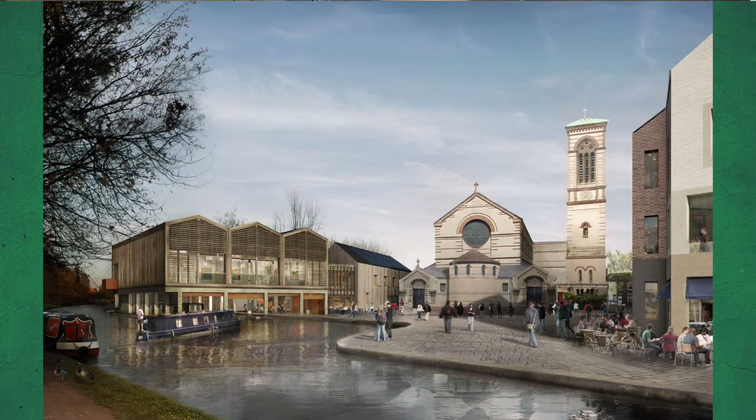My original client, SIAF, acquired the site from the receivers of Spring Residential in 2013 as well. And there then followed a period of 2 years of consultation with the community and various stakeholders. And the content of that scheme included a new boatyard with 3 docks, a cafe, a community centre with offices, the dance studio, badminton hall as phase 1, and with offices and a preschool with a private garden as phase 2. In 2015, there was a resolution to grant consent for the scheme, and in 2016, this was cemented with the conclusion of a Section 106 legal agreement.

Now, unfortunately, this scheme was not implemented due to a combination of factors, including the community's requirement to have a 3-year period to raise the funds to build the community centre. That, with other cumulative elements, rendered the scheme unviable. So we went back to square one, continued the negotiations with the community and with JWT. And one day, one of the JWT trustees suggested that we look at the option of building phase 1 of the community centre. The reason being that in the previous scheme, we were building the boatyard and we were going to leave a deck ready to take on the new community centre.

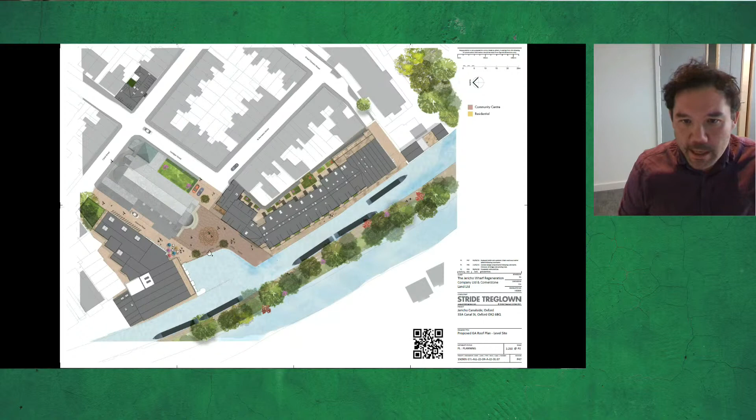It's quite important that you follow my cursor on the screen as I identify the different elements. And also just to say that the full set of planning documents are available to view on the Oxford City Council website. So I'm showing a selection here, just giving an overview and not going into too much detail, but you can see the numbers of documents, and the full scheme is available to view on the council's website. So to update on the current status of the scheme, to help you orientate on the drawing, this is St Barnabas Church here, obviously a significant aspect being a Grade 1 listed building.

So the scheme, as previously displayed at public consultations and previous presentations, has remained fundamentally the same with the exception of the bridge. It falls into 4 main constituent parts. On the north side of the site, we have the Boatyard and Community Centre building proposed. Then on the south side of the site, we have the private residential housing proposed. Both those elements, the Boatyard and Community Centre and aspects of the residential, will face onto the centrepiece, the piazza and the west elevation of St Barnabas Church.

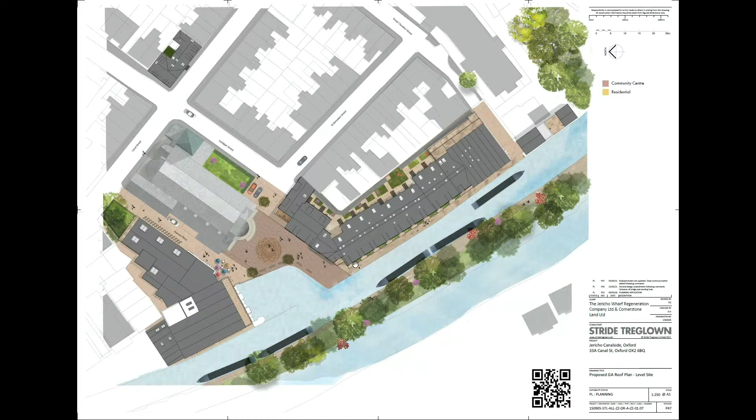We're also proposing a new access into St Barnabas Church, which allows for level access without ramps into the church, with the idea of bringing the original entrances into play and really completing what we would see as the aspiration of the church to front a public space, which it has never really done in the past. And then the other element of the scheme is the existing community centre, which is being converted into 6 apartments. So if I go on to the next slide, I can talk about the actual detail of the scheme.

One can see in the Boatyard here, 3 docks are being provided, 1 wet dock and 2 dry docks for the community to use. And then this line here, if you follow my cursor, will form the boundary of phase 1 of the community centre. So at the ground level of the community centre in phase 1, we would have a cafe and a shop and offices for the Boatyard. And then on the upper floors, there would be a badminton hall, further cafe spaces, and a dance hall, as well as offices for use by the community.

Beyond this line towards the east here, towards Canal Street, would be phase 2, the constituent parts of which would be a preschool nursery on the ground floor with its own private garden. And then above that would be offices for the trust to utilise or to let out as it sees fit.

And then in terms of the actual access to the boatyard, there is a basin, which I will go into a little bit more detail about on the following slides. In terms of the residential element, we have proposed 18 dwellings altogether for private sale, which effectively link Cardigan Street, the Piazza and the canal side into a single terrace composed of 15 townhouses and 3 apartments, which are on the south side, incorporating parking as well for all the residential.

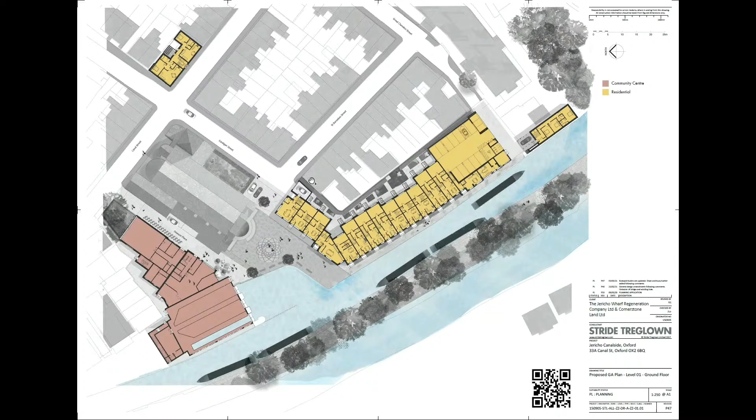And then finally, the community centre conversion here would comprise of 6 apartments being converted into affordable flats. Now, as Stephen mentioned earlier, following almost 9 months of consultee negotiations with various bodies such as the Canal and River Trust and the Environment Agency, the outcome just in the last month or so was the sad decision ultimately by the statutory authorities that they could not support a bridge across the canal into the Piazza,

fundamentally for 2 reasons. One being that on the Environment Agency side, a bridge would hinder flood water, which is quite a severe consideration now in terms of our impending climate change. And then from the Canal and River Trust side of things, it was significantly a matter of navigational safety and visibility, and also towpath safety, because of clearances bridges require. And unfortunately, the constraints we had in this scenario were too great for them to be able to support. In fact, they objected to it.

Another aspect of the scheme worth mentioning was that physically, the removal of the bridge retains the rest of the scheme in a similar footprint. However, the management is altered, because previously the basin was acting both as an entrance into the boatyard as well as a winding hole, and that combined with the bridge was also of a concern to the statutory authorities. So the current proposal is for the basin to be actually controlled by the boatyard, which allows for temporary mooring while there's a crossover of boats coming in and out of the actual docks themselves.

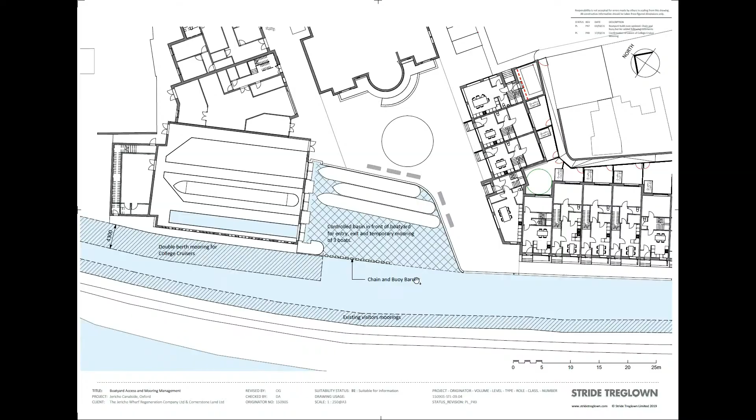And as such, you can see there's a chain and buoy proposed to help control this area so that it wouldn't be used for turning. So effectively, in all respects, the existing canal remains as it is in terms of its alignment. If I move on to this drawing, I'd just like to explain the amount of detail we had to provide and work through in terms of the flood mitigation.

As Stephen said, the national modelling of floodwater levels has altered in the last couple of years. So even since this previous application, which was approved in 2016, flood levels have changed, and the site, and in fact most of Jericho, actually sits inside a floodplain. Now, in achieving a building of any kind on this site, we have to meet three criteria. One, that it would be safe for use. Two, that it wouldn't impact on the actual volume of the existing floodplain. And three, it has to meet the requirements of flood water movement. So it's not just volume, it's actual water movement.

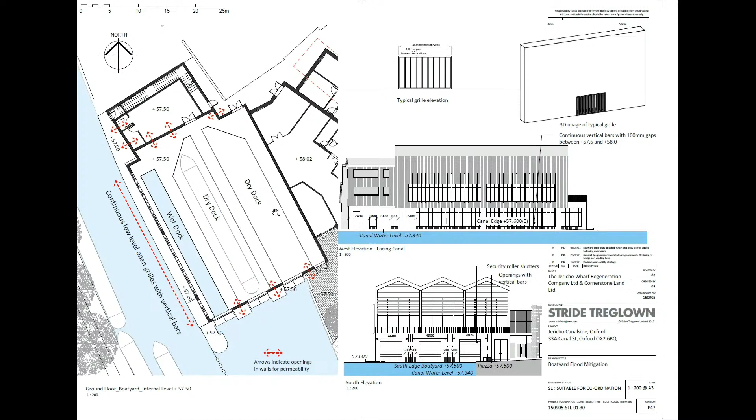So you can see here, this drawing displays the actual dock, which is going to be designed as a robust building to allow it to flood, in that water is allowed into the building. But you can see with all these red arrows, the Environment Agency wasn't satisfied that the sluice gates could just be opened and allow it to flood. We had to put additional holes into the building to allow water flow to mitigate flooding without any impact elsewhere. And as such, the building had to incorporate open grilles, etc., down at the low level. I move on to the next slide.

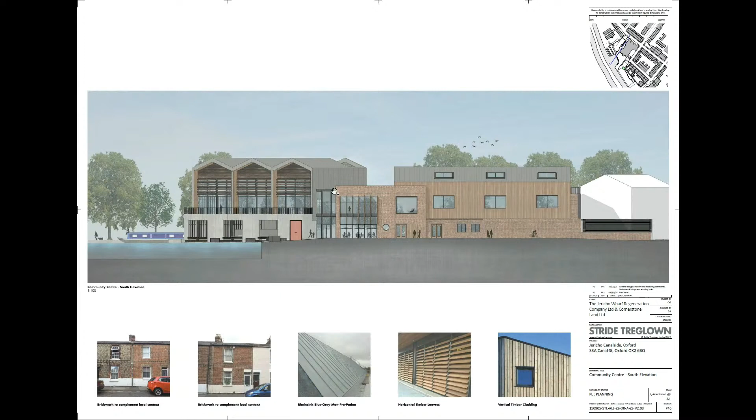And then coming up Dawson Place towards Canal Street, there's a slightly different change of character in that we're bringing in the idea of tying in with the Jericho brickwork, looking at various forms of brickwork to connect with the local scene. And this image here displays the canal-side elevation, again highlighting the community centre as a fairly industrial-looking building sitting within the setting of the church and the piazza, and then showing all the low-level grills that allow for flooding.

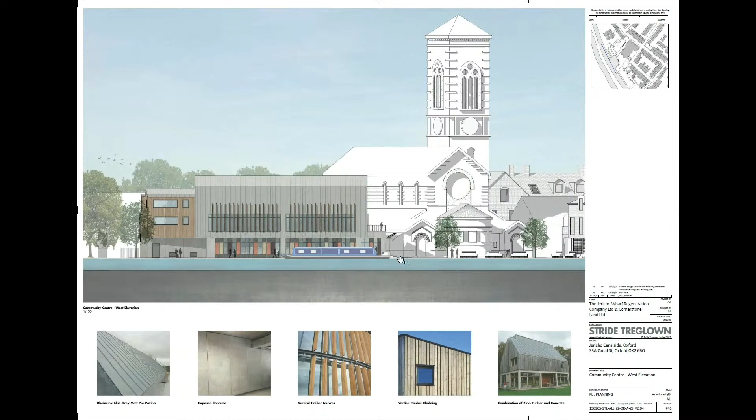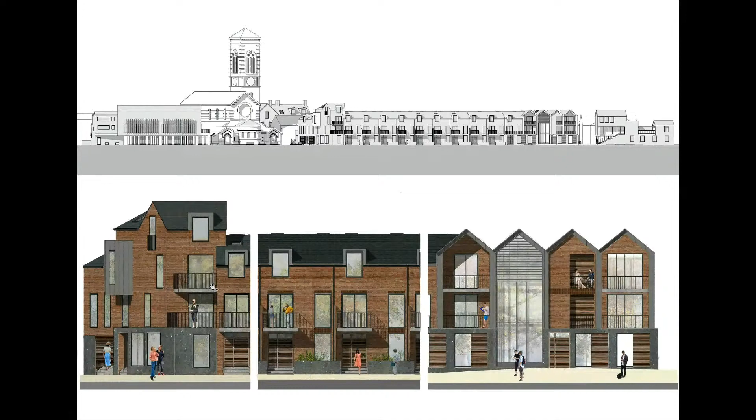This image here demonstrates the approach for the residential aspect, again picking up a bit of a cross between a vernacular and industrial mix that's commonly found on waterside buildings, but tying into the locality with the use of the variable Jericho brick patterns.

And this is the finishing slide, actually, just to show the intent of the quality of the scheme doesn't stop at the building, because of most importance really is the landscaping and how the finishes are on the ground in the public spaces. So we're proposing here high quality materials using natural stone cobbles mixed with paving slabs, which would give a high quality and rich finish to the public areas.

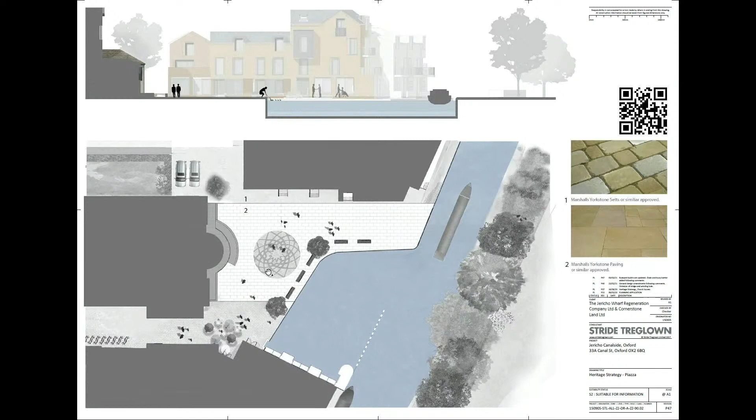And an aspect to also bear in mind is that in the SPD there was a call for some form of artwork to be incorporated into the overall proposals, and here we are identifying artwork inlaid into the piazza, and the final design is open really for when we hopefully move on further. And that concludes my presentation, John.

Thank you very much. Okay, let me ask you 2 or 3 questions as well. This question I asked you, is the bridge firmly dead? Is the parrot dead? My answer refers back to Stephen, because it's sad to lose the bridge in that location, but when one has statutory authorities objecting on health and safety grounds, it becomes virtually an impossible thing to try and deliver.

So the bridge doesn't necessarily have to be dead, but the ability to have it in this location combined with the navigational traffic makes it a very difficult element to negotiate. So how will people get to the station from Jericho? There's an existing bridge. So they'll have to come out and go back in. If they're in the community centre, for example, have to go down Canal Street and over the Mount Place Bridge, correct? Effectively, as it stands at the moment, this would be the case.

Were you surprised at the vehemence of the objection? I've seen the letter from the Canal and River Trust. Were you surprised at how much they objected? I was, simply because of the length of time that it took to get to the point of being so vehement. They always raise concerns. We've had this idea on the table and in discussion with the inclusion of the CRT in pre-applications since 2018 at least, possibly earlier. So it was a surprise and a disappointment when they went to the highest authority in their organisation to conclude this with a very significant objection.